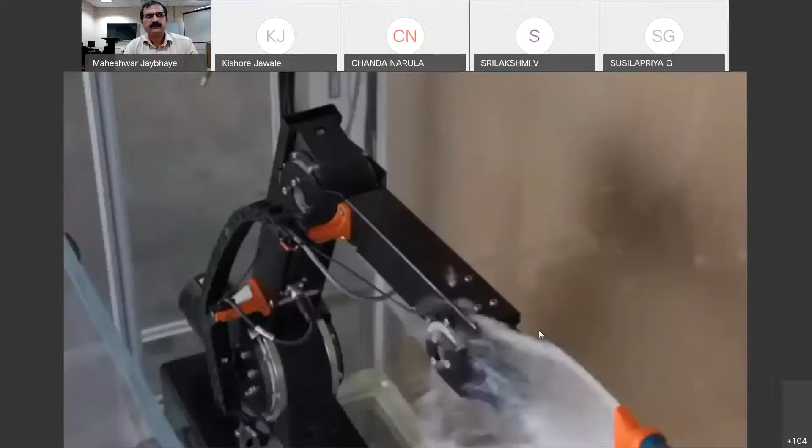This igus is one of the companies, and this RoboLink is a low-cost robot which was developed for 4 degrees of freedom, 5 degrees of freedom. So what we were talking about related to this: a robot controller, power source as hydraulic or electrical or pneumatic or combined, and your robot manipulator, and to the manipulator you are attaching the end effector at the end. So this is the basic structure of your robot and robotic system, with all the peripheral devices attached to this robot system, different sensors, external sensors, internal sensors, which are part of your robot system. So that attachment we will be talking about today as a gripper.

Grippers are the end effectors used to grasp and hold the objects. Whatever grasping or handling of objects is happening will be with the help of grippers, and these grippers play a major role in handling the parts, because they take care of all the forces which are coming on the robot system. That object has to be picked correctly, properly, without any damage, and it has to be handled effectively to

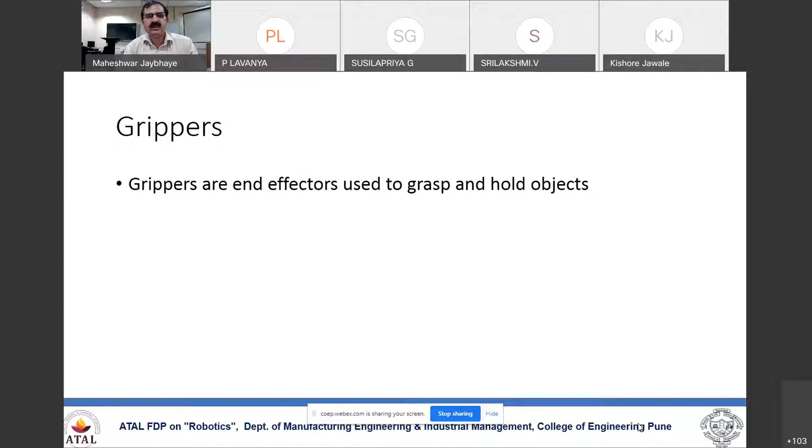So first part is you are going to handle the objects. So to handle the objects you will have categorization of these grippers by the main source of mechanism. So mechanical grippers are the preferred ones for heavy duty, heavy jobs which have to be handled, and you are least bothered about scratches when you are handling. But again you will be taking utmost care when you are applying these robot end effectors for handling the objects.

So the basic categorization which we are considering is mechanical grippers, magnetic grippers, vacuum grippers, adhesive grippers, and some miscellaneous devices, all tools which are attached to your robot wrist, which will be treated as miscellaneous devices or special purpose devices for performing the task.

So going ahead with mechanical grippers, when you consider objects of different nature, maybe circular, rectangular, or irregular shape jobs, whatever may be the shape of the job, when you have to handle it, you have to grasp it properly. And the grasping mechanism you adopt has to be either from the external side or the internal side, and that is one categorization for classifying these grippers, whether you call it an internal gripper or external gripper.

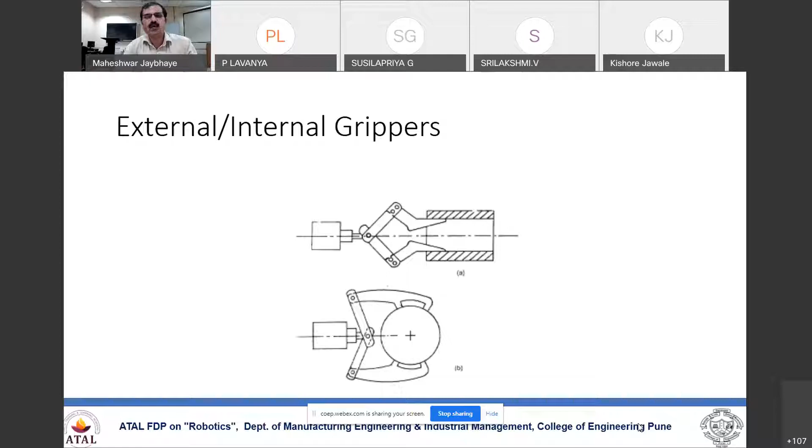From internally, you are holding the objects. Generally, those are the hollow objects, and those are nothing but called as the internal grippers. So the mechanical gripper structure, you will be coming across it in almost all industries; you will be finding these mechanical grippers being used as a regular practice.

And there are many advantages of the mechanical gripper: you will be having a lot of power to handle those particular objects, and the fingers which you are using for holding the objects are modular type. So as per your requirement you can have changes in the lengths. So you can see the interchangeable

fingers. That means due to continuous operation of these fingers, when they are getting actuated, there may be chances of wearing of the pressure pad which is attached at the end of the finger. So you can replace those fingers and put shorter fingers or longer fingers according to the job, according to the size and shape of the objects. And likewise there is flexibility in your mechanical grippers to handle the objects.

So the linkage mechanism which you are observing is of different nature. As it is mechanical, you will be doing it all through mechanical linkages, but the actuation mechanism will be either hydraulic, pneumatic, or electrical. And along with that, you may have different mechanisms for operating this particular mechanical gripper.

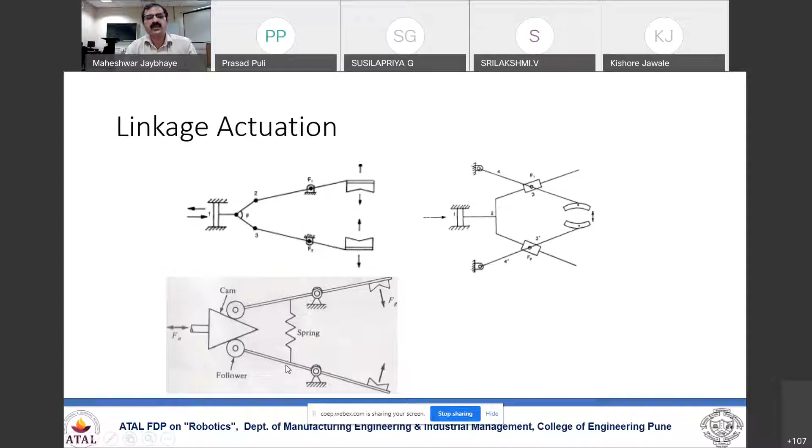This cam and follower, if you observe this particular figure, when this triangular cam part goes ahead, the roller will come up. So as this triangular portion comes, on the basis of the up and down movement of the cam, the opening and closing of the end effector fingers will take place. So the exact amount of opening and closing will be controlled by the cam and follower as a mechanical linkage. Or in some cases you are going to use spring actuation also for holding the objects as a part of applying the forces.

You may have different kinds of screw type mechanisms like a lead screw, a motor operated reduction gearbox, and you are having lead screw. So this lead screw is getting operated in clockwise and anti-clockwise direction, and with the help of that you can have this finger actuation which will be opening and closing. So if it is clockwise it will get opened, if it is anti-clockwise it gets closed, and accordingly you are going to hold the objects.

So these mechanisms will be different for different grasping and the shapes which you are going to handle for the robot system. So different gripper actuations have been mentioned. You can have rack and pinion arrangement. Central pinion is there, and it will be having teeth over here, and that rack also will have teeth. So clockwise or anti-clockwise rotation of this pinion will move this particular jaw or these fingers, and accordingly you can hold the jaw on the same line.

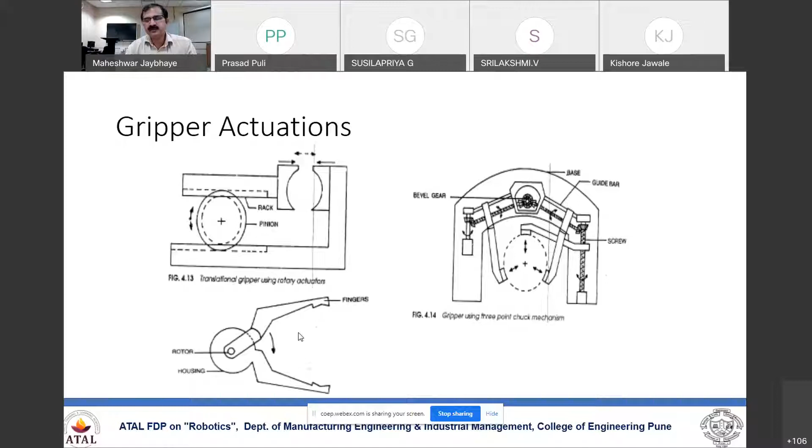In this rotor, one finger is fixed, and only the other arm which is attached to the rotor will get operated, and you can have a holding or grasping arrangement. So likewise you are going to have these gripper actuations for holding the jobs in mechanical structure. And these are a few of the schematics. Again, you are going to have rack and pinion. These gears are getting actuated. So for driving the gears, again you will be requiring a motor or shaft which will be operated through your drive mechanism. So here it is a rack.

Though there are no teeth being shown, it is a schematic. So you will be seeing that this rack has to and fro motion, and accordingly this sector of the gear will get engaged, and this will actuate your rack on this vertical surface. So opening and closing of the fingers will take place with the actuation of your rack movements through linear slide movement. And here it is in rotary movement.

With the help of this lead screw and threaded block, it will get opened and closed, because this lead screw will be touching this finger, and this block will get moved when it is rotated clockwise or anti-clockwise, and accordingly you are going to have the grasping arrangement. So these are the modular fingers.

With mechanical grippers, you can have finger replacement, because if you are running the robot arm for lakhs of cycles to hold an object and put it in another place, every time friction is generated at the tip of your fingers, and due to this continuous frictional force there may be wearing of these fingers. So after a certain duration you have to replace the fingers, and that is done with these modular fingers. So replacement of fingers is possible, and different sizes of workpiece can be accommodated by attaching different lengths of fingers.

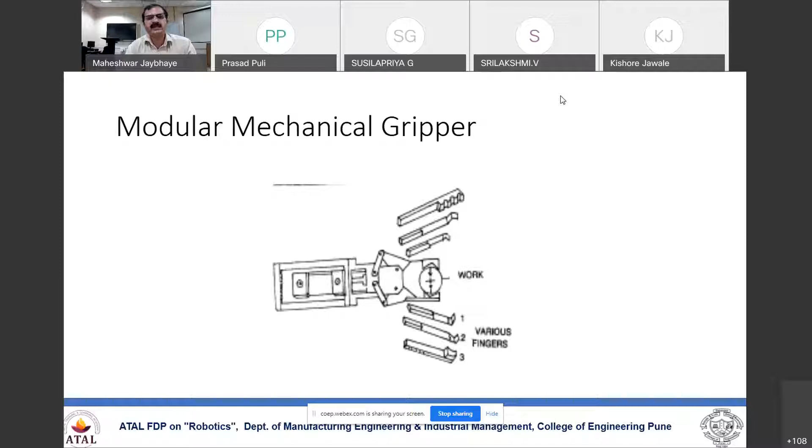So that weight of the object is equal to your grasping force. So the self weight of the object must be grasped, and the applied frictional force on the surface of the object is to be slightly greater than the self weight of the job. Only then will you be able to handle the object, otherwise it will get released from the fingers.

So the second part is the vacuum grippers. I have not touched upon the design part because it will be too mathematical, but you have to keep it in mind. Whatever load is applied to a particular area, the load upon area is nothing but the pressure generated, Pascal's law, a universally accepted phenomenon.

So whatever pressure you have to apply to grasp that object, it must be applied in a way that, whatever load is coming and whatever area will take that load, the pressure that gets generated has to be actuated by your finger, by your gripper, on the surface of your object.

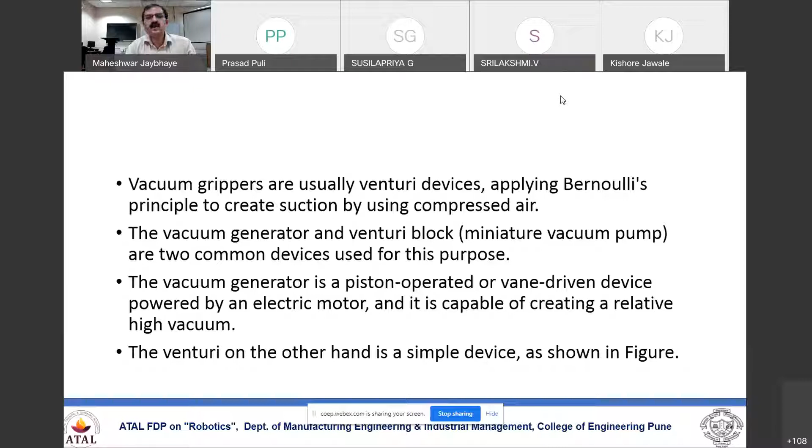So part of your vacuum gripper is the suction cup, because a vacuum gripper has the Venturi device attached to the vacuum cup. That attachment to the Venturi meter is nothing but your suction cups. Why do we go for suction cups or vacuum grippers? Because they require only one surface to hold. Uniform pressure is applied on the surface.

In mechanical grippers, if your finger is of curvature type, it will apply pressure on the surface. But if it is a flat surface and uniform pressure is to be applied, you can use suction cups or vacuum grippers. They are generally used for light load capacity, applicable to a variety of different materials, and also a low cost mechanism.

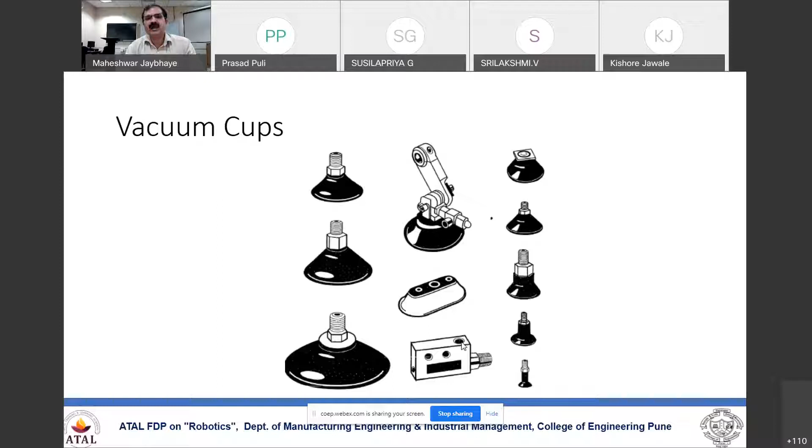These are a few of the attachments. The vacuum cup is attached to the manipulator. The first one is vacuum cups, and the second is the attachment of that vacuum cup, how it is attached with the help of either knobs or the metallic part connected to the vacuum cups, and this will be attached to your Venturi meter, and accordingly whatever vacuum is created, you will apply sufficient force on the gripper.

These are also vacuum cups or suction cups, of different shapes and sizes according to your requirements for handling the jobs. And also note the nature of the cup. Some of them are circular, some of them are elliptical. So according to the nature of your task or work, you can select the vacuum suction cups.

To a Venturi meter like this, you attach your vacuum cups. You have seen those attachments, and accordingly you attach them to the block. So air in and air out. This exhaust is what creates the vacuum, and accordingly you have your interface with the mating surface.

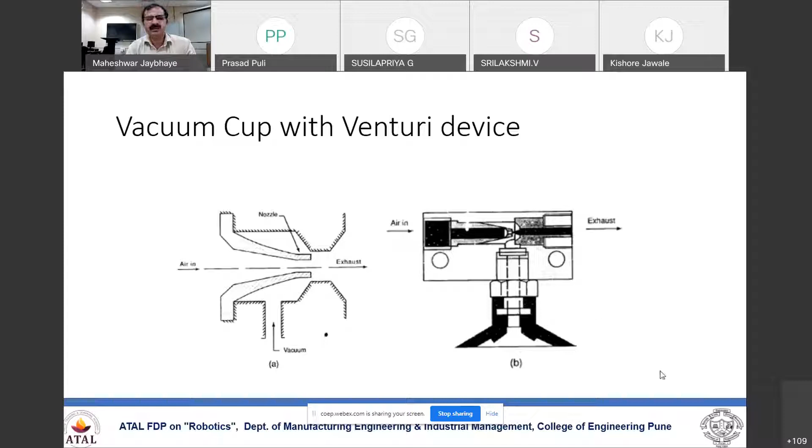It is plastic sheets which has been mentioned, but you may have metallic sheets. In the sheet metal industries, you will have a number of stacks of these metal tin sheets or maybe other materials. So that handling can be done with the help of these vacuum grippers. So from the top, the vacuum cups will be getting attached, creating a negative pressure or the vacuum at that interface, and then you are going to handle the object.

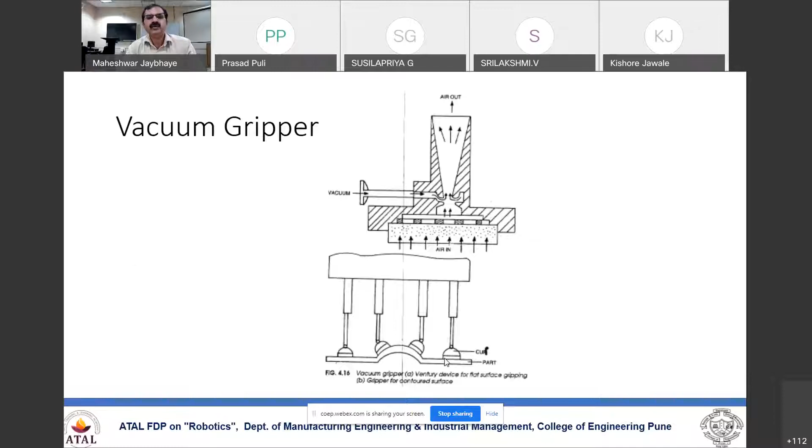These are heavy duty oval pads, so oval type surface, and also the material for these pads which is being used is nitrile or NBR, or you can have this FKM. These are the material names which are specified. There is no full form of this FKM. So it is a specific material which is being used, and chloroprene rubbers, especially for the elastomeric properties of these vacuum cups, or silicone rubbers. These are the materials which are being used for making these suction cups effective.

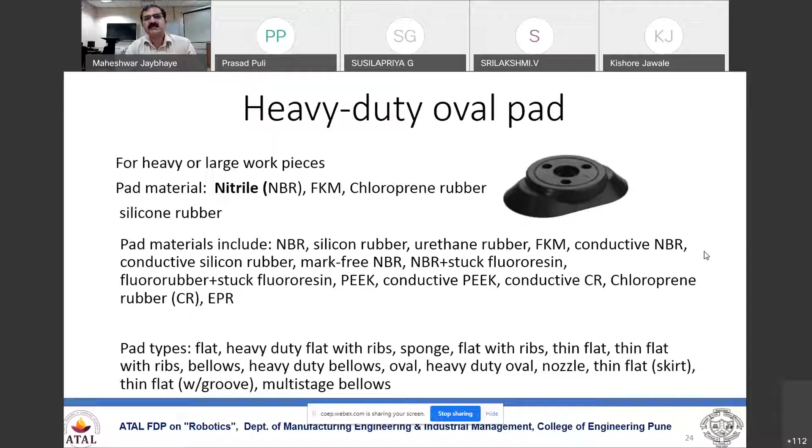So the third category under this handling is magnetic grippers. Again, the limitation of earlier vacuum grippers is that if the held surface has multiple holes on the surface, and when you are holding that object, if continuous air comes from the bottom side, then there will not be a negative pressure created, and it will not be able to handle it. So in those cases you have to go ahead with the magnetic gripper, so that the cold surfaces or metallic objects can be effectively handled by using the magnetic force of that magnet.

Advantages of this include decreased air cost. In earlier vacuum grippers, you would require a special arrangement to create negative pressure, requiring a vacuum creator drive. So a vacuum pump will be required.

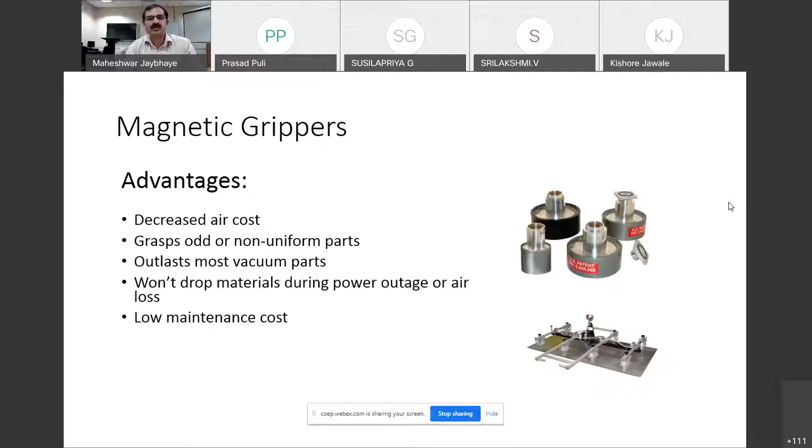For each of these cases there are mathematical formulations, design analysis and so on. This has to be taken care of, because if the magnet being used is not able to generate magnetic force greater than the self weight of the object, the object cannot be handled and moved from its place. So these design considerations must be taken care of while selecting components, designing the robot system, and making it usable.

This is one of the schematics related to magnetic grippers. You may have electromagnetic force being generated, and a long metal sheet can be pulled. But a limitation of this magnetic gripper is that you cannot use it for plastic materials, glass materials, or other materials. It must be ferrous materials or sheet metals with ferromagnetic properties only can be handled.

But again, it has huge capacity for handling surface objects, and you can effectively handle large shaped jobs. You can have permanent magnet grippers where the permanent magnet is used, and generally the handling is okay when attaching it to the surface. But when you have to detach that part, you will require another accessory, a stripper or detaching attachment. With the help of another cylinder or mechanism, you have to detach the sheet plate from the permanent magnet contacting surface, applying extra force greater than the magnetic force applied, so as to remove the part from the gripper.

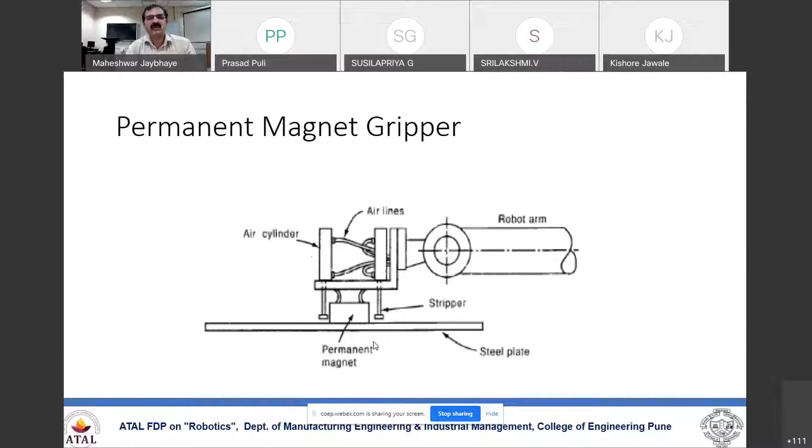So these are few of the schematics related to robots. Another category is inflatable grippers.

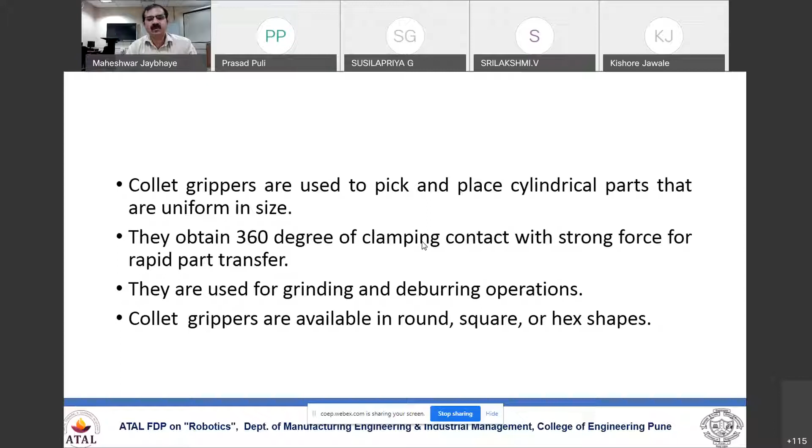Inflatable grippers, which we have seen as an inflatable diaphragm—on a similar line, you will also have expandable grippers. When you need to hold internal surfaces, you use inflatable grippers. But when you need to grasp external surfaces, you use expandable grippers, grasping the object from the outside. These are generally irregular shaped work pieces, which you cover and then create a vacuum kind of enclosure around the surface to handle them—surrounding the object from the outside, or gripping hollow objects from the inside. All these are special attachments that you use. Generally, these expandable grippers are used for fragile parts or soft materials when you want to handle those jobs.

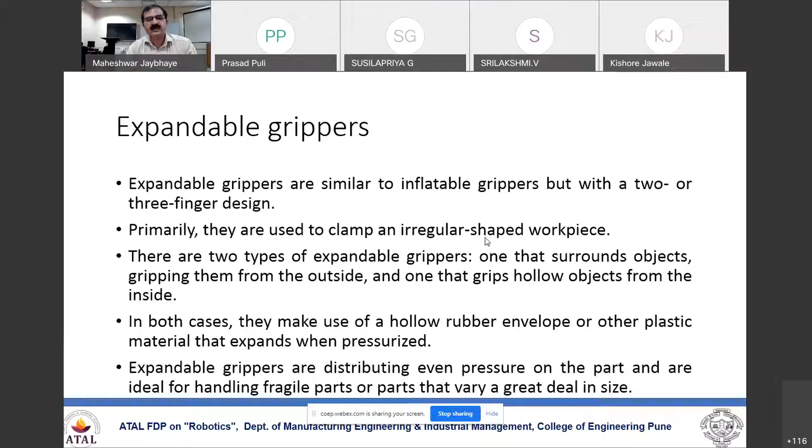Some design criteria when designing robot systems: you have to mainly focus on what surface is to be grasped, what is the target area to be grasped, and what is the shape and size of the object, because on that basis your force will be applied. You will consider these things for the actuation mechanism and the controlling mechanism. All this has to be given as input to the controller, and only then will you effectively handle the object. It's not so easy that you just take any dimensions and ask the robot to handle things—there is a lot of engineering work behind designing robot systems with control electronics, control systems, and mechanical systems.

All problems related to scratching, distortion, or damaging surfaces have to be taken care of. Enough precautions have to be taken so as to handle the objects with proper care.

If there are variations in dimensions happening from the production line, your robot or gripper should be interchangeable or able to accommodate those objects. So with slight changes in dimensions, your robot gripper should be adaptive enough to change shape—the opening or closing area of the fingers, or the pressure pads or vacuum suction cups—applying sufficient force if there is a change in the dimensions of the object.

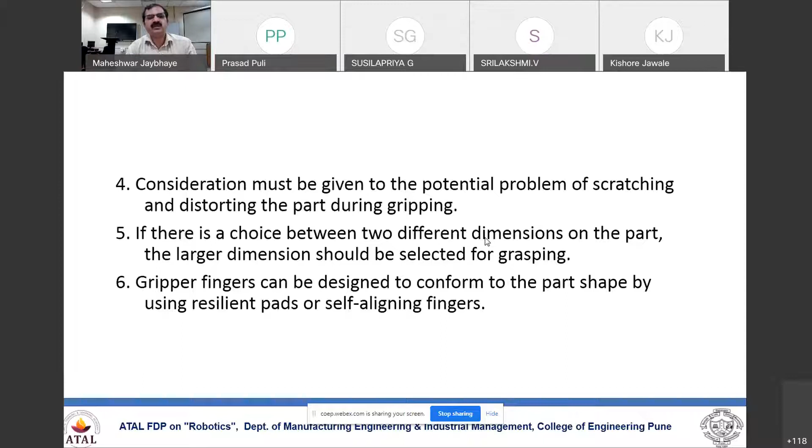Many design criteria are there, and you have to take care of all of them because the design revolves around grasping force. What is the weight of the object? What is the speed and acceleration at which you will be moving that object from one location to another? The speed of the robot arm matters because the velocity and acceleration generated will create forces applied on the robot structure, and you have to take these into consideration.

The physical structure and frictional forces have to be considered, and coefficient of friction as a surface property has to be properly considered so as to hold the object in mechanical, vacuum, and magnetic grippers. In all cases, the coefficient of friction of the interfacing surfaces has to be properly selected for effective handling of the objects.

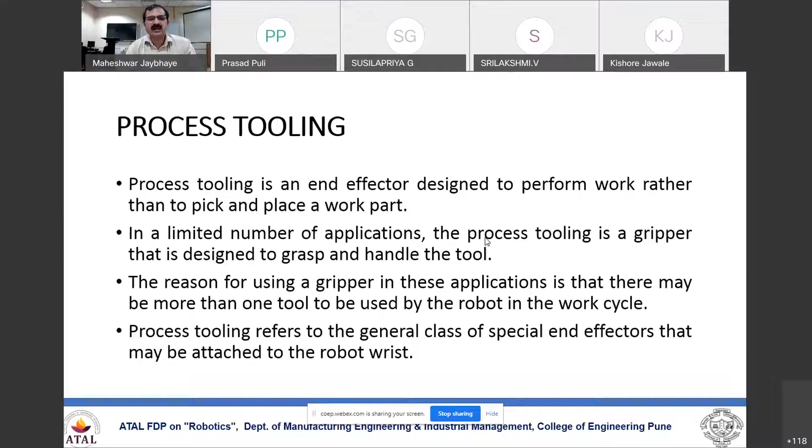There are process toolings. Many industries use spray guns or welding guns, which come under process toolings. As per your requirements, you will change those tools and use them for the application, completing your task and work cycles as needed, and accordingly the attachment of this special process tooling will be done.

So this was about grippers as a part of robot elements. Briefly, I will move to the other elements, but prior to that, whatever we have discussed, I will just share a few more things.

The grippers which we have seen, I will play a demonstration of handling material with the help of these vacuum cups, to show how it is working.

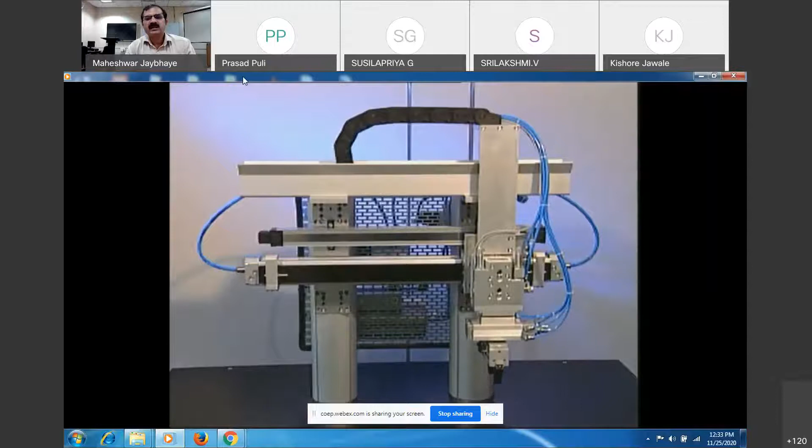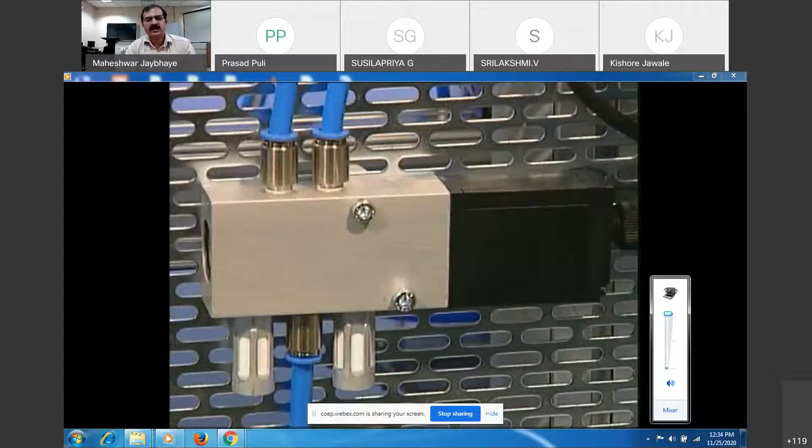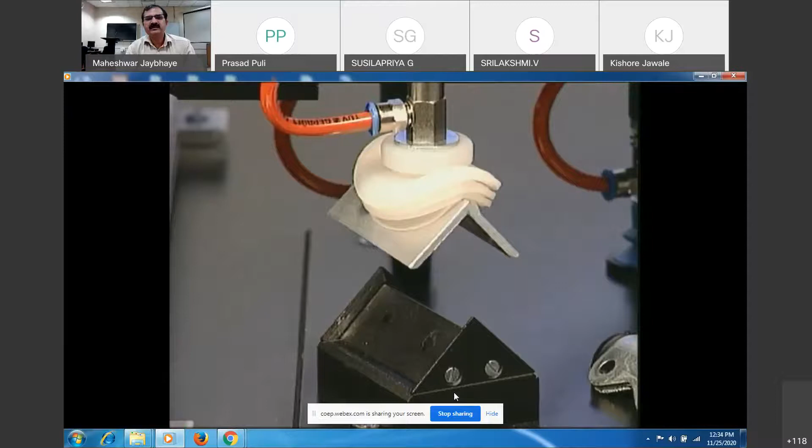This enables us to adapt our products to suit the application while at the same time reducing cost. A 3-jaw HGD grips the vacuum generator modules and supplies them with vacuum.

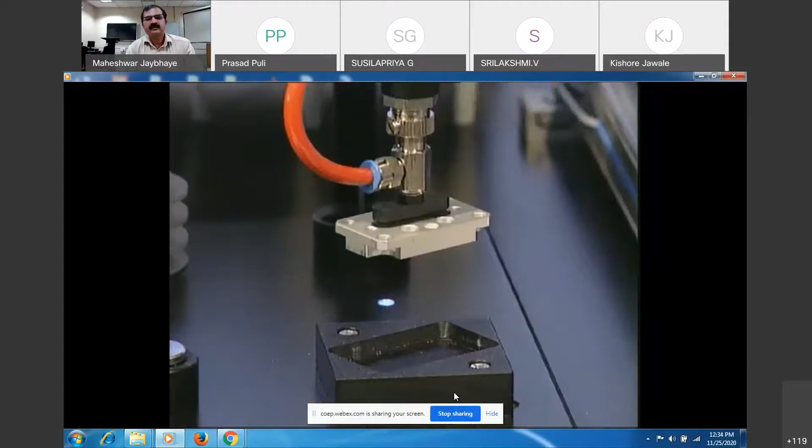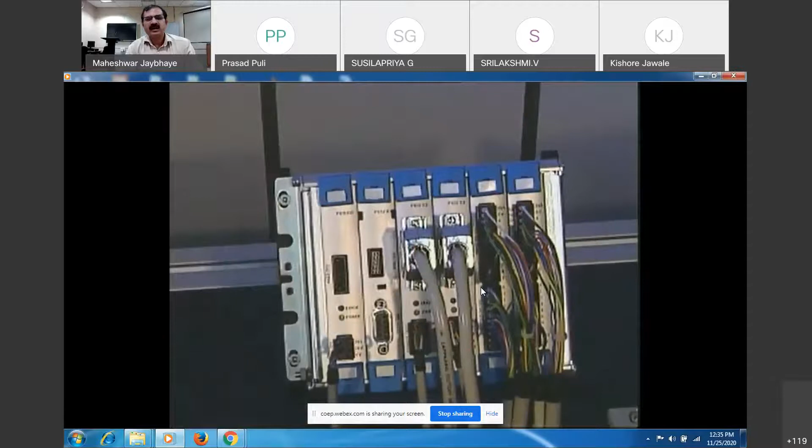So whatever movement is happening is linear drive, linear actuation, which is happening with the help of pneumatic cylinder. All this is pneumatic actuation. All the slides are getting actuated with the pneumatic drive, pneumatic motors, and with the PLC control unit. Along with this, you can have PLCs being interfaced for low cost automation of these robots.

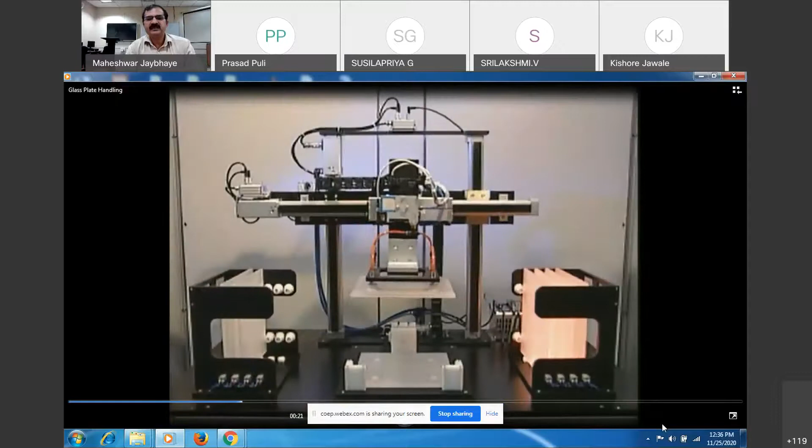If you are having glass sheets, glass plates, how to go with those glass sheets? It's hot work handling glowing glass plates. Yet with silicone suction cups from our ES range, it's no problem. See, these are working with vertical glass plates with surface temperatures of up to 190 degrees Celsius. And if the temperature is also high, 80, 90 degrees, manual handling is very difficult.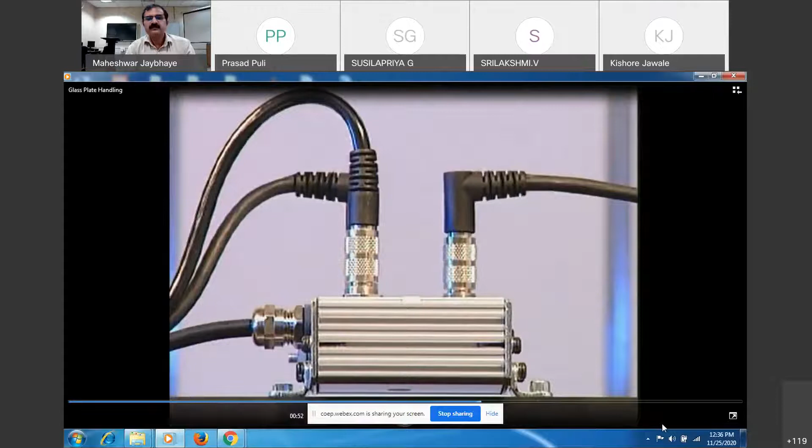The digital displacement encoder integrated in the DGPL linear drive saves space and, at the same time, is protected against contamination. The SPC200 Smart Positioning Controller is optimized for single and double pneumatic axis systems, but can also be expanded to control up to 4 axes. With the help of pneumatic motors, an intermediate position module, and compact drives which you are going to use.

The DRQD twin piston drive performs 2 swivel movements of 90 degrees. So that operation of 90-degree rotation, that actuation is opening and closing of these pneumatic valves to this attachment, and accordingly you can have these particular motions which will be happening.

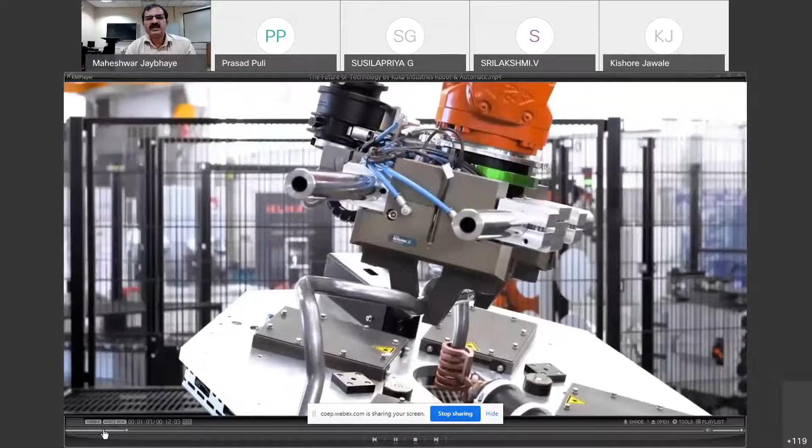So in automation, what we have seen yesterday, few of the slides related to this, the KUKA robot. This is handling of rods with the help of KUKA robot. So these are collaborative robots, but not with the human being. These are collaboration between two robots. One robot is doing some task, and afterwards another robot is handling that job. So likewise, synchronization has been done.

The bending and all these operations are being performed with the help of press machines. Then you can have different shaping of those rods, but holding is being done with the help of robot, and this will be difficult with the human being. So likewise, you are going to have numerically controlled or computer controlled machines which are getting operated, with interface between robots and those press machines, die machines, or other machines. So these are the different applications.

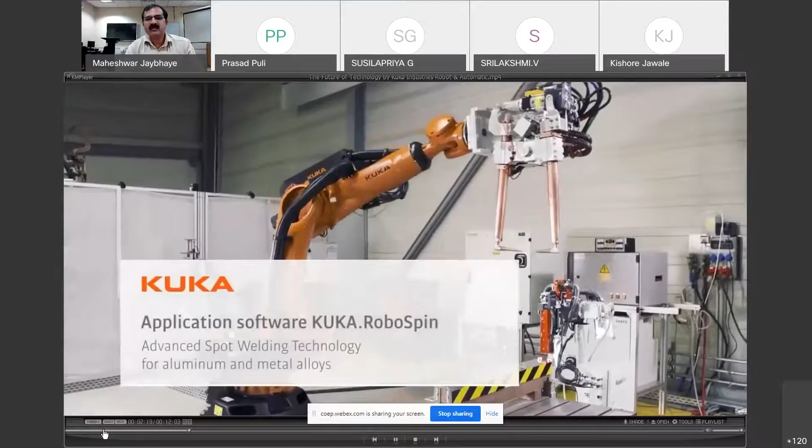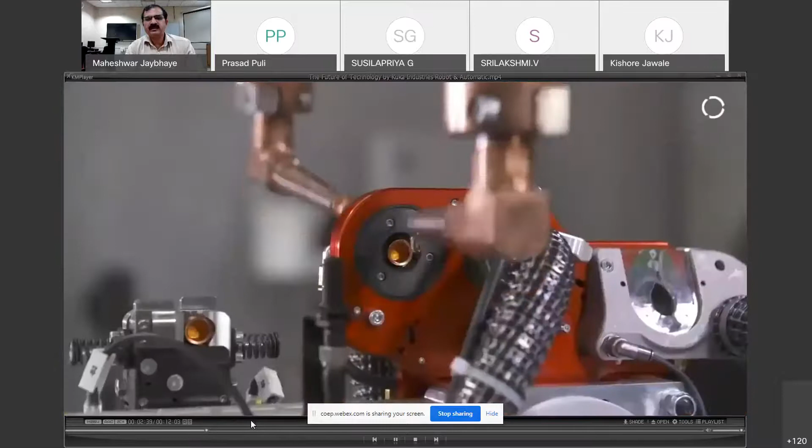The automatic measurement of this, taking out the thing, assembly of those. So one by one, those parts are getting picked up and you are joining it, putting it to the location. So these are special tools which you are going to use. These are the weld guns, you can say.

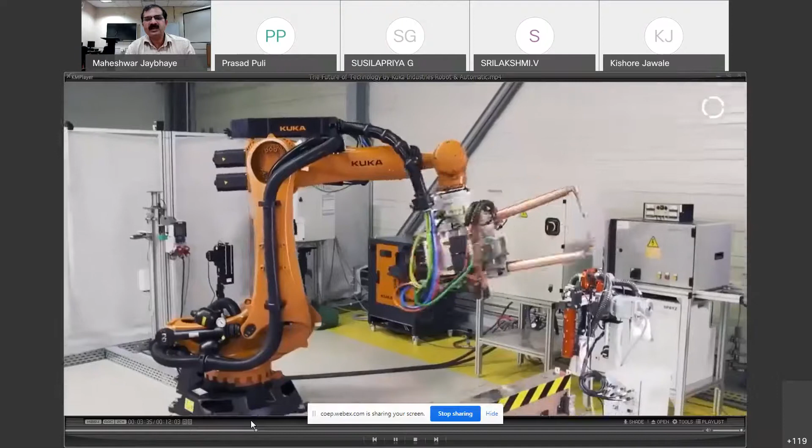And also you can connect through the cloud. You can control this robot through the programmed motion. All the data can be collected, all the process can be simulated. You can get ready data available, how many jobs have been done, what was the preciseness, how many tasks have been completed. Likewise, you can have an IoT-based robotic system implemented.

This is spot welding which is being done. And also in the simulation, you will get what is the resistance, how much is the force. So that simulation also you can get. Likewise, IoT based data you can get when you are applying this robot.

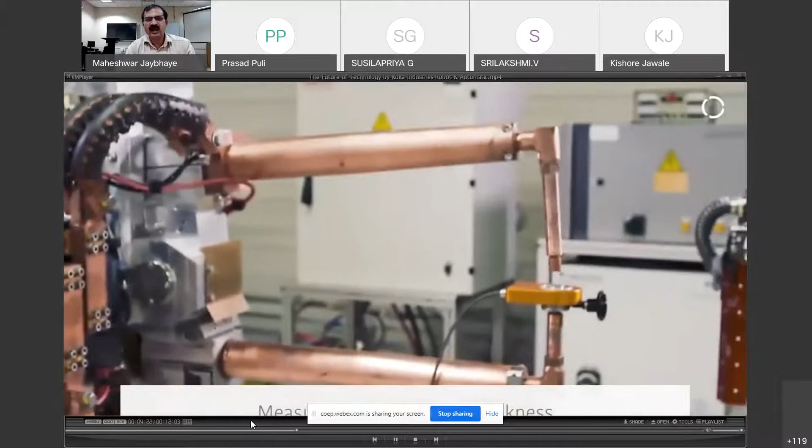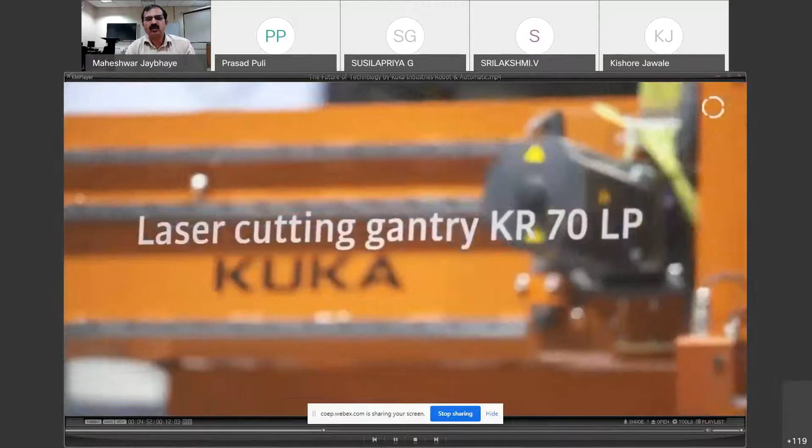This is a giant robot, which we considered initially, the Cartesian type robot for laser cutting. Huge structure, the arm is getting moved on the top. This is laser marking initially. So you are marking all the small holes at different inclinations, different angles, because it is very difficult for human beings. So all that marking from different corners, and afterwards you may have the cutting, engraving, or gluing for those locations.

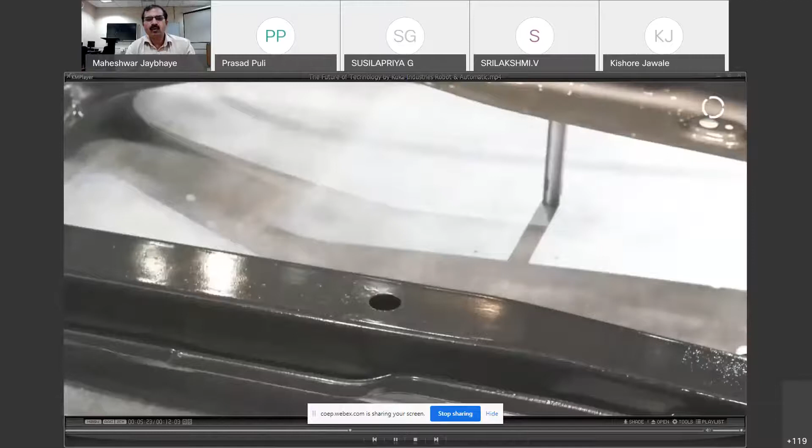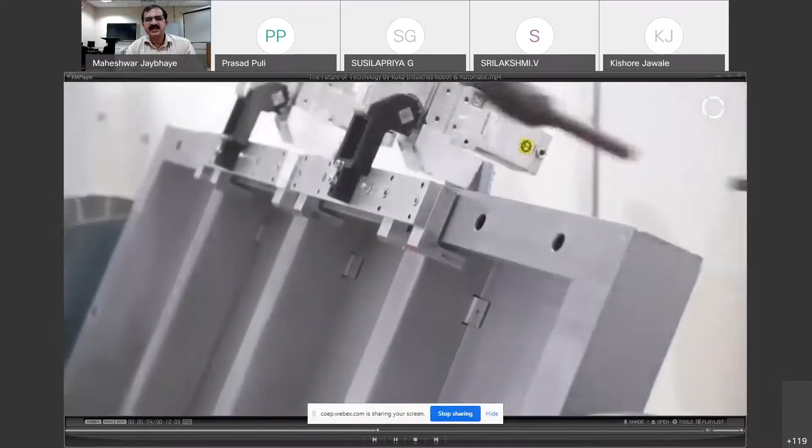So you see contact tips for measuring, for applying, or different cutters or laser cutters, huge structures you can use for spot welding, and the complete structure is getting rotated. So machining surface and welding surface, robot interface, it will be a different interface. This is mechanical type again.

Online gauging, measurement of the sheets, whether it is the same thickness or not. So online measurement you can do. So that quality check, 100% quality check, can be done with the help of these robots.

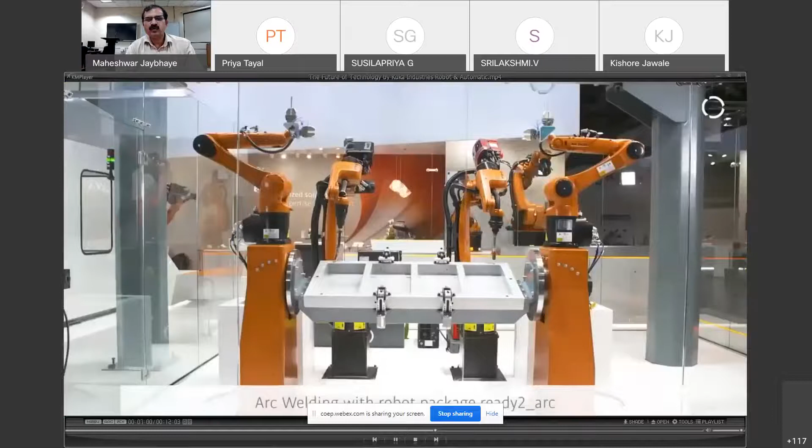See the flat surface. So your gripper also may be of flat nature, with the magnetic kind of thing. This is mechanical gripper again for packaging applications or assembling applications. Assembly of rods into holes. 4 robots working simultaneously on the job.

So cleaning of those holes, inspecting those holes, can be done with the help of these particular attachments, and all joints, you are observing how flexible it is. Welding torches, the current flow and those things can be measured.

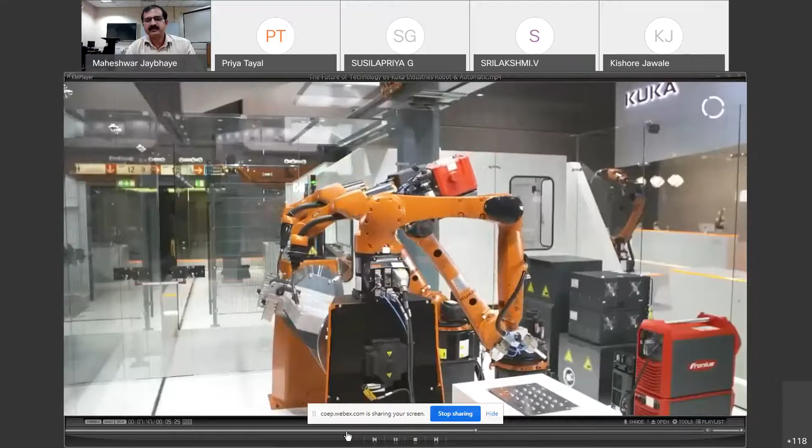With different jobs, loading and unloading of the parts on the machinery, huge machines taking out the parts. This is mechanical fingers. So whatever we are talking related to the gripper, you can have these attachments as a gripper, and that curved part which you are seeing as pressure pads. So those attachments you are going to have, replacing those things as per requirement, and you will have force sensors also.

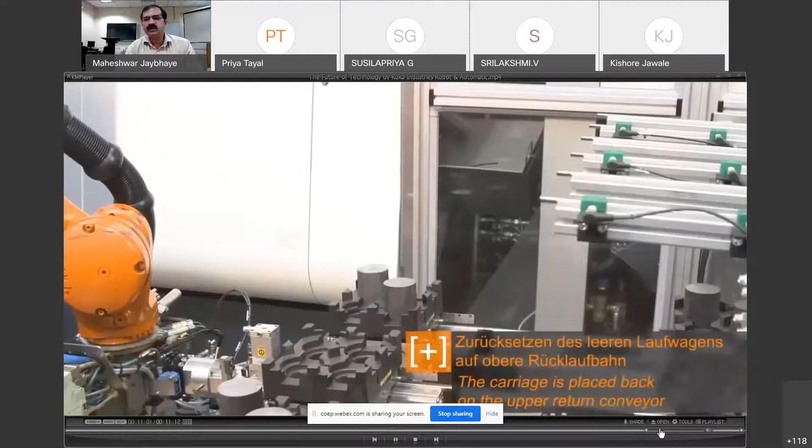So I think this gives you the detailing of all these mechanisms. Simultaneously, you are going to have multiple jobs which can be handled as per the dimensions. And this is an attachment with pressure pads, suction cups, multiple suction cups being used. So sheet is being handled. So same robot with different attachments, you are going to have different handling which can be done.

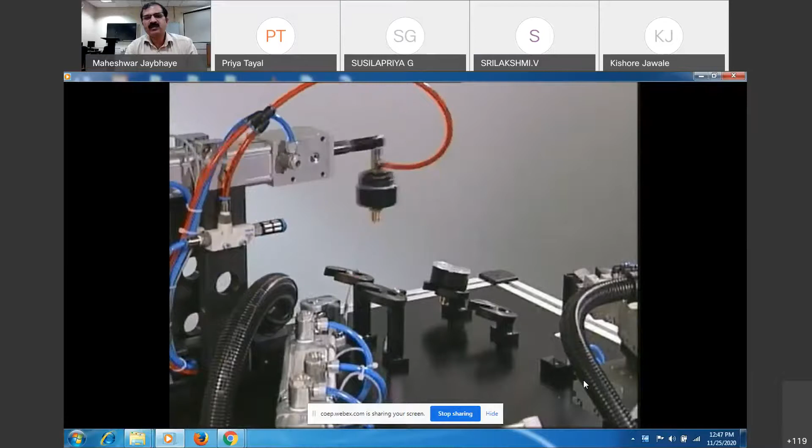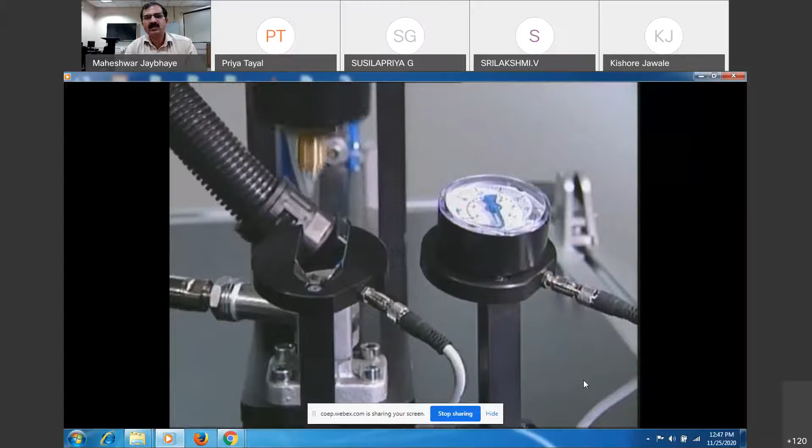So when it has to handle from the top surface, you are using the vacuum gripper, and when it is to be held at the threaded portion, so now see the vacuum which is getting created and you are handling it, putting it to another location, and when it is being put, you are handling it through the mechanical gripper. So this linear actuation as well as vacuum grippers are nothing but part of your robot elements, robot grippers overall.

So again I will briefly go through sensors and actuators. Already the majority of the portion is covered. I will rush through this because today's speaker gave these insights related to sensors and actuators; the majority has been covered in the morning session. But again, briefly I will go through actuators, mainly the actuation movements you are going to have.

So the main source of actuation is the power source, and that too hydraulic, pneumatic or electrical drives. This is the main source of actuation for all the elements, and all the joints you are going to use for your robot's mechanical structure will be operated either hydraulically, pneumatically, electrically, or a combination of these in your robot system.

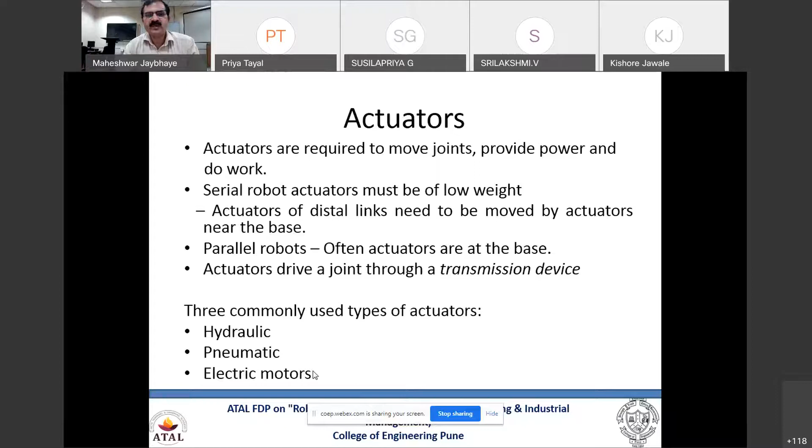Hydraulic actuators are a huge setup, because hydraulic operation happens through the hydraulic power pack, and you will require a huge amount of oil as a reservoir which will be recirculated, and you are using that incompressible oil so as to handle heavy jobs. So you will not be bothering in those cases about the accuracy and preciseness of that robot, but it will be handling heavy structures, heavy loads, maybe 100 kg, 50 kg, 10 kg, like that.

If a huge job has to be moved, being slightly off, 1 millimeter, 2 millimeter, will not make much difference, but still it will try to have precise positioning within the limitations of the mechanical structure; you may have least vibration and a high power to weight ratio for this hydraulic system. Controlling is through a solenoid valve or servo control valve. The entire system is electrical motors, pumps, accumulators, and cylinders used for these hydraulic systems.

Pneumatic systems. I'm just going through these because in the afternoon session you will have hands-on demonstration of simulation software related to hydraulics and pneumatics. We have Festo software and also Automation Studio at our place, and our students regularly use this as a simulation tool for hydraulic and pneumatic actuation.

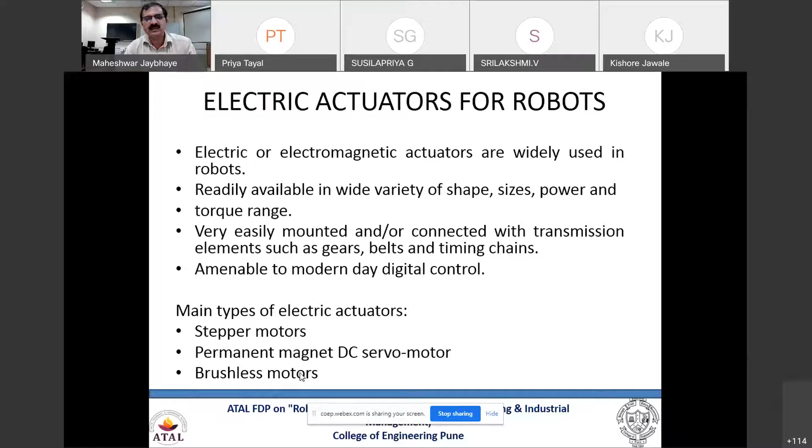Electrical actuators are different kinds of stepper motors, permanent magnet DC motors, and brushless motors. This comes under the electrical motor category. Various speakers have talked about stepper motors, servo motors and DC servo motors for feedback control actions, closed loop control actions for these actuation mechanisms. So different constructions, different sizes, and their working with reference to your requirements. You are going to select these, and all these drives are interconnected with different sensory mechanisms.

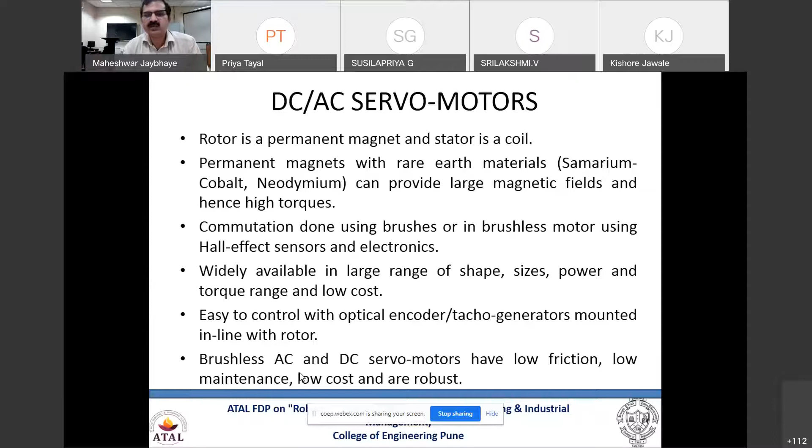So these servo drives will have optical encoders or tacho generators, which give information related to the position and orientation of the drive which has been achieved. That feedback is given to the controller, and accordingly positional movements happen. Different kinds of AC/DC servo motors, glimpses of those, and there are different sites also mentioned related to this.

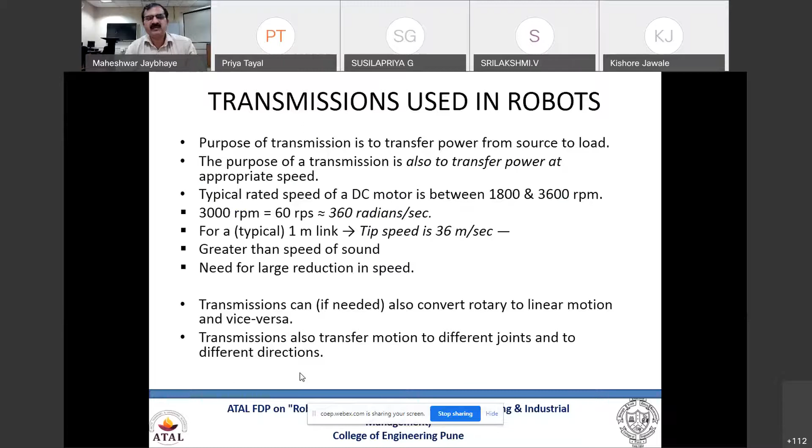Transmissions: there are all these mechanisms which have to be transferred. So you will be requiring linear or rotary. These are the mainly two transmissions which are happening. You have seen linear motions which are happening in the robot structure and rotary motions which are happening. So L type, or linear type or prismatic type, and R type as a rotary type you are going to have. So while designing the robot structure, you have to take care of stiffness, low weight, backlash free, and efficient. This has to be taken care of when we will be selecting the drives and using it for our actuating mechanisms.

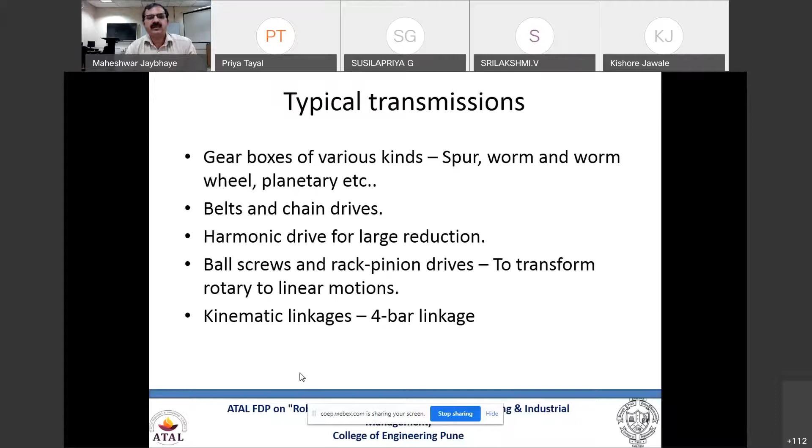Various gearboxes, belts and chain drives, harmonic drives, ball screws, rack and pinion drives, and kinematic linkages. These are the elements of your robot system, or you can say actuating mechanisms which are being used for your drives. So those are being shown represented with the schematics.

And in the morning session also, Dr. Dhanvijay sir has talked about a variety of sensors. Same has been considered many times. You will find similar kinds of terms are being used because in mechatronics also sensors are coming as a part of elements. Sensors are coming, and other speakers also may talk related to this. Maybe the wordings, maybe the content will be different, but the same things in a different way. It has been put for the understanding as well as for the implementation of this robot system, because sensors are a feedback system which gives correctness and effectiveness of your robot working.

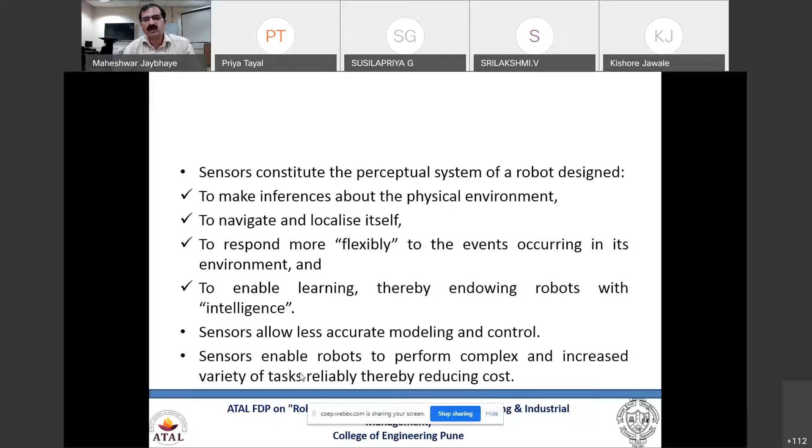So all these signals from the sensors are communicated to the robot controller, and then the robot controller will take action about those particular signals. So it is a device to make a measurement of a physical variable of interest. So what you are looking for related to those particular signals, you are going to send the information. And generally it is an electrical signal which you are considering, and that has to be converted into other categories of signals, mechanical signals, actuations, which have to happen.

Classification, as it has been done: internal state sensors and external state sensors. So in the robot system, whatever internal elements are there and their feedback given to the controller, it will be internal state sensors. Whereas from the surrounding, if you are putting some cameras, some CCD or CID cameras, some other sensors, and that has to be communicated to our robot system, then it will be external state sensors. Many times your robot is working along with different machineries. So whether that machine is operating, whether that machine has finished the task or not, that will be checked, and accordingly the signals of those sensors will be given.

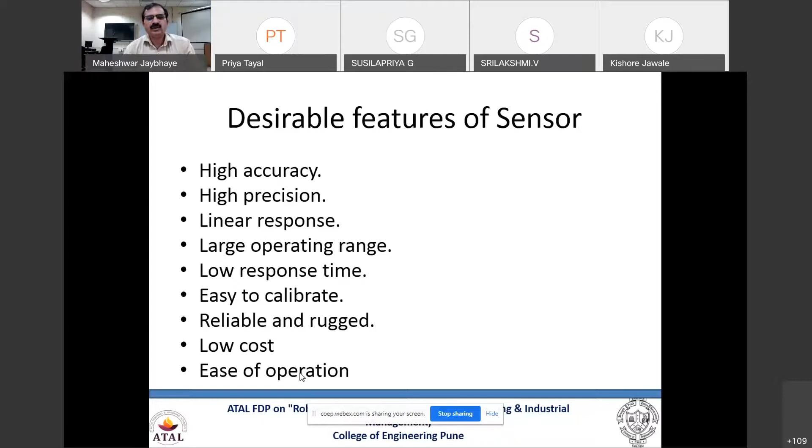So desirable features for sensor selection, what it should have: high accuracy, high preciseness, linear response, large operating ranges, low response time. It should respond fast, easy to calibrate, because after a certain time of usage, every sensor will have a certain error. So that has to be calibrated and set so that you can have precise measurements through the sensors. Also we will always be expecting that it should be reliable and rugged, and also that it should be available at low cost. So these are some of the preferable things which are being mentioned.

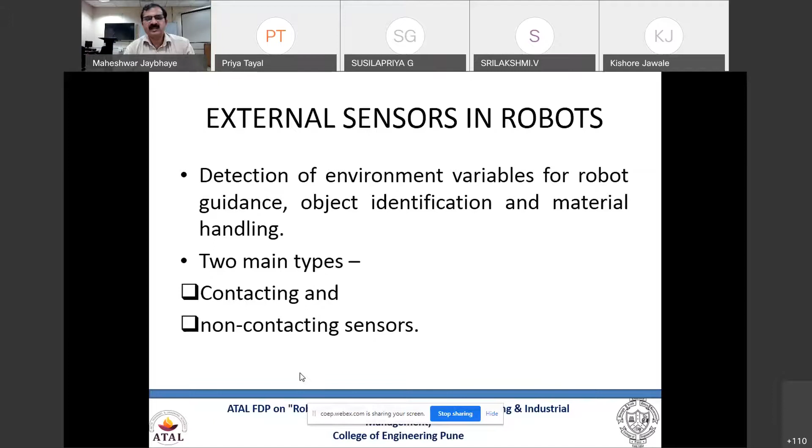When you come to external sensors, mainly it is the grasping elements as well as the sensors from outside the system. That means external sensors. So external sensors are again categorized into contacting sensors and non-contacting sensors. So touch sensors are nothing but contact type sensors which directly come in contact with the objects or surfaces, and then give a signal that yes, the object is present. Whereas non-contacting sensors identify the objects from a particular distance, and then indicate the presence or absence of that object or device. So it will be either proximity or range or color sense or speed sense or other signals which you can get through the sensors.

Optical encoders have already been discussed by the earlier speaker. So these are directly mounted on the drives, which will be giving you the feedback, and accordingly your motion will be controlled.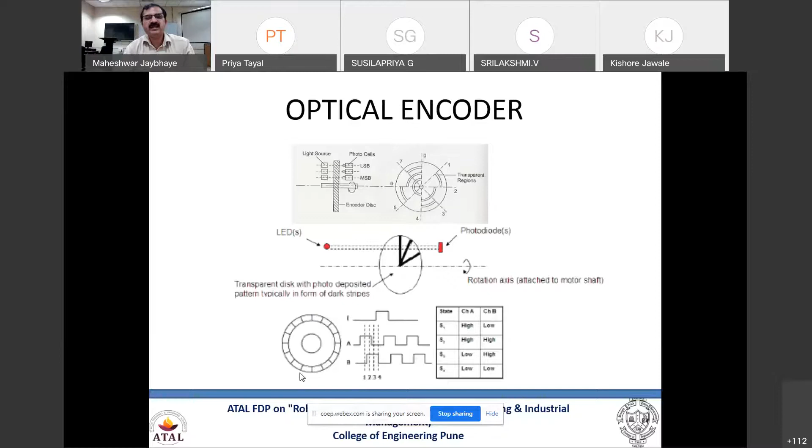Then potentiometers: in some of the earlier robots they were there. Nowadays they have been totally replaced with encoders. In earlier cases it was this voltage, which is directly proportional to resistance, and that resistance is directly proportional to rotation of the joint. So how much rotation has happened can be indicated with the help of potentiometers. So this was the old application of these potentiometers.

Resolvers are also being used for getting the position of these drives, with the 90-degree phase difference which you are going to get with different voltage signals, and accordingly you can have the position which can be analyzed. Tachometers or tacho generators also give the position at different time durations, at different locations, what position was there. So it is nothing but a voltage signal proportional to your velocity, and that angular velocity of the rotor is going to get controlled.

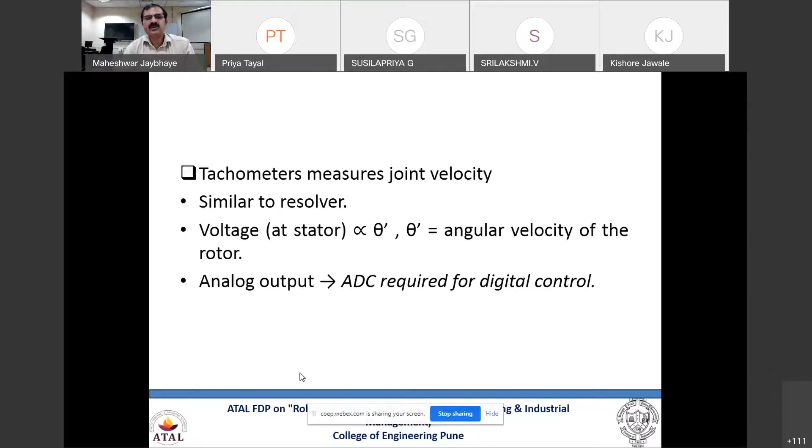Force and torque sensors are also being discussed. So almost all these forces which are getting exerted and torque which is getting generated have to be sensed and sent to the controller so as to handle that job effectively. These are some of the elements which are mounted on the robot end effector so as to get how much force is being exerted on the wrist, on the joint, on the fingers. Likewise, you are going to have these blocks which are being mounted. It is an inbuilt structure of the robot.

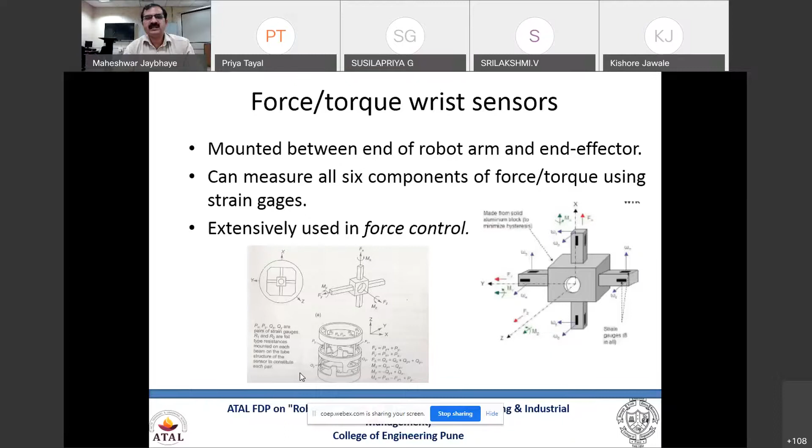In some of the cases, you may have flex pads or flex force sensors, strips of strain gauges which are being used, and you can get the forces which are getting exerted on the surfaces. So these are some of the contact type sensors with micro switches or fingers which are being put. Only after touching is it going to get a feeling of that object, whether it has been captured or not. And non-contact type. So in contact type you are going to have either a single micro switch or multiple arrays of those micro buttons or switches.

Accordingly you can have a tactile array sensor, tactile in the sense of touch sensors, and array is nothing but if you have a number of these sensing pads, sensing buttons available, then you can have a tactile array sensor. So it will detect the presence of the object, and also, due to that resistance which is getting generated at the tip of the pressure sensors, you will come to know the shape and size of that object. So for that purpose you can use it.

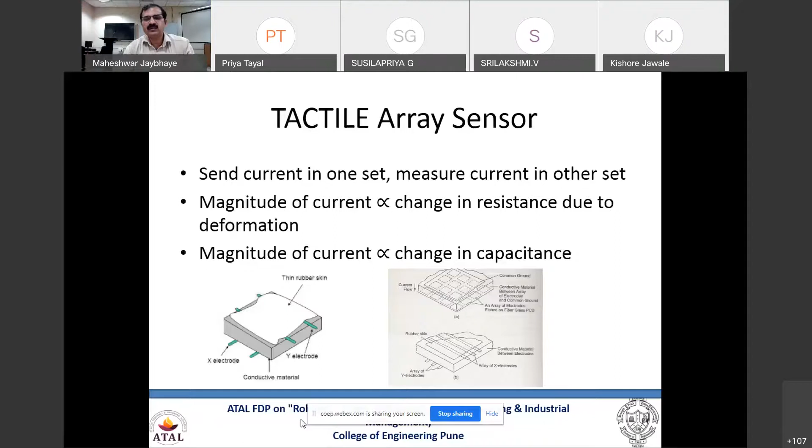Also different skins are available. So whatever the surface which you are going to hold, these touch sensors will generate the conductive voltage in those particular XY directions. So that will give the exact shape and size of the objects. Proximity from a certain distance, as a non-contact type sensor, whenever you are going to use it.

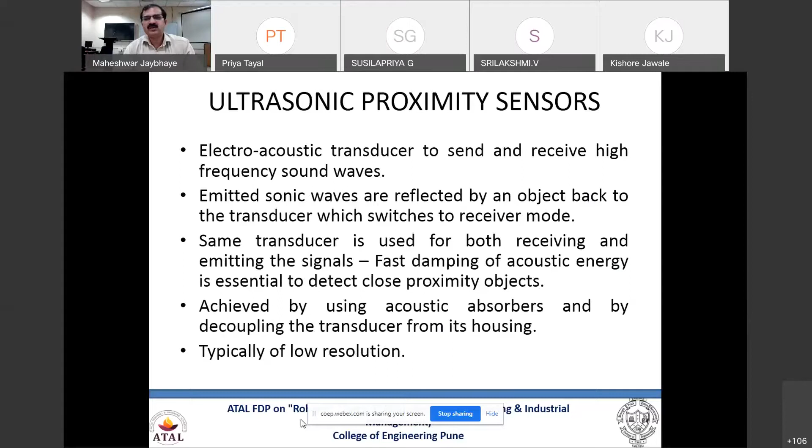Ultrasonic sensors, again, for detecting the object from a certain distance. So on the principle of acoustic waves, you will use it as a signal; the transmitted signal and receiving signal you are going to capture, and on that basis you will be finding how far that object is, or is there any obstacle in the vicinity. So in both ways you can use these ultrasonic sensors as proximity switches or proximity sensors. Ultrasonic proximity sensors, some of the important features and the applications.

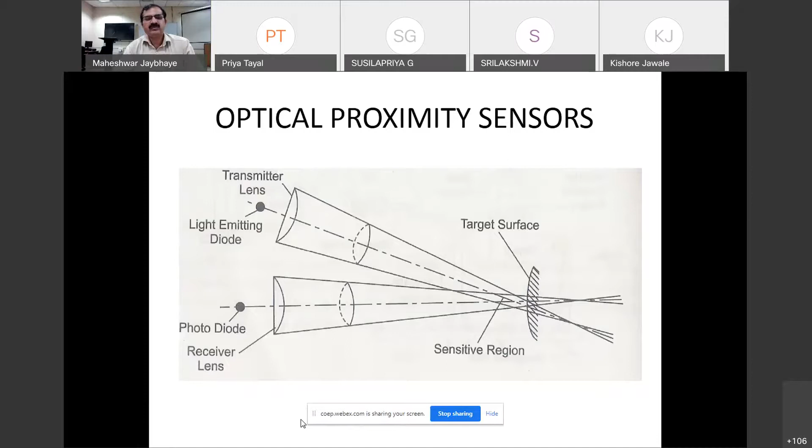Then optical sensors: you are going to have light beam sensors. So from one point you are going to have light emitting diodes which will be emitting the light source and it will be captured at another end. And through that also, what is the time lapse for emitting and receiving. So you can judge the distance of that object or that particular target, which will be communicated to the control system. Range sensor is also of the same nature.

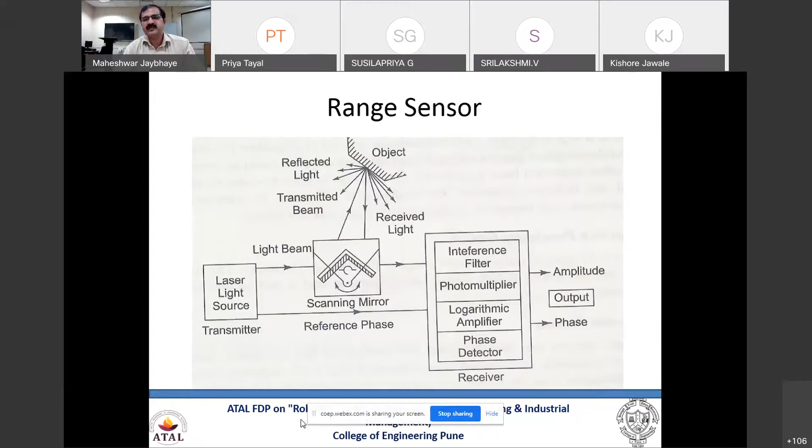You will get the range of that object, how far it is from the sensor. So that can be identified with the help of either a triangulation mechanism or structured lighting mechanism, or you will be finding time of flight range, sending and receiving back. And lastly you can use a vision system also for this sensing. So this is one of the range sensor schematics. A laser light source is being used and then the object reflects that laser light beam back, and then you can have the interfering signals, which are controlled and analyzed.

And the last part of these complex sensors is nothing but machine vision systems, and almost all these robots nowadays are having this vision system, because like our eyes, robot will be having the vision sensors being mounted and integrated with the control system.

So whatever may be the surrounding environment of that robot, it will be captured, and whether it is the right product, right part which is being collected, operated, that has to be detected, and accordingly your machine vision system will be working. So altogether this is a separate domain, again part of your robotic system, but embedded in the sensory system with the instrumentation part.

All this having the lighting, camera, analog to digital conversion, data processing, image processing, and then finally the robot application. That means the exact target which we are deciding, whether identification of the job, inspection of that job, or maybe taking the decision related to that job.

That will be done at the end as a task, but prior to that a lot of things have to be taken care of, and all these filters, processing of images, initially capturing the information in the form of signals, sampling, quantization, encoding, all this will be part of signal processing, and then it is used as the final signal given to the controller, and on that basis your controller will act and perform the task.